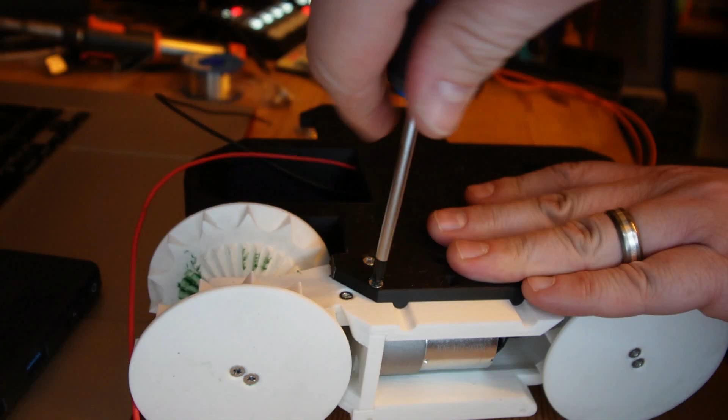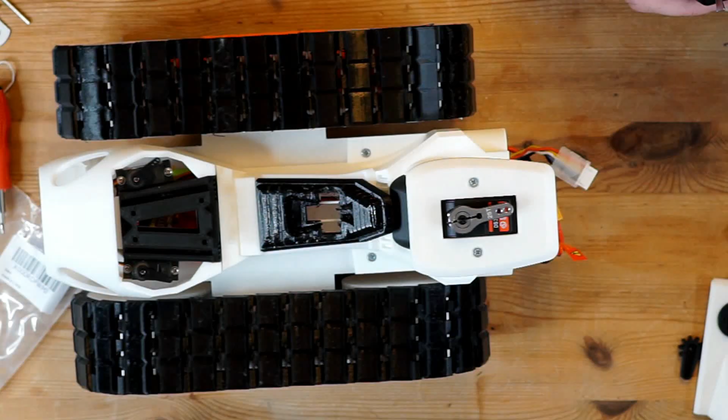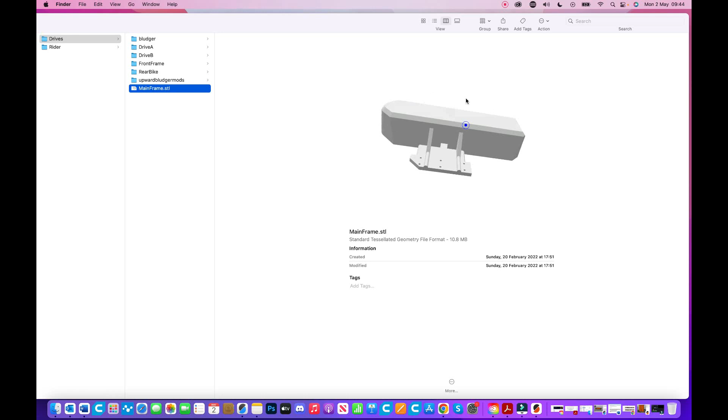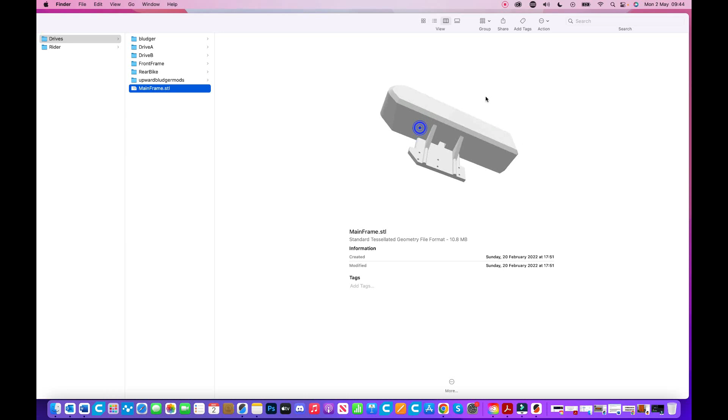Okay, so the files we're going to be working on straight away are drives A, drives B, and also the main frame. For the main frame, I'm going to be printing it in this downwards configuration, with this bit on the bed. You'll see there's some bridging that needs to be done in this battery internal compartment, certainly on the Lulzbot and also the Prusa. Any quality printer will have no problems with these bridging points, so hopefully you'll have a well-tuned 3D printer for this kind of stuff. I wouldn't put any infill or supports inside of that because it'll be a real pain to get out, but that's a relatively simple one. 20 to 30% PLA or PETG is generally what I've been using, and that's a really easy one to start off with.

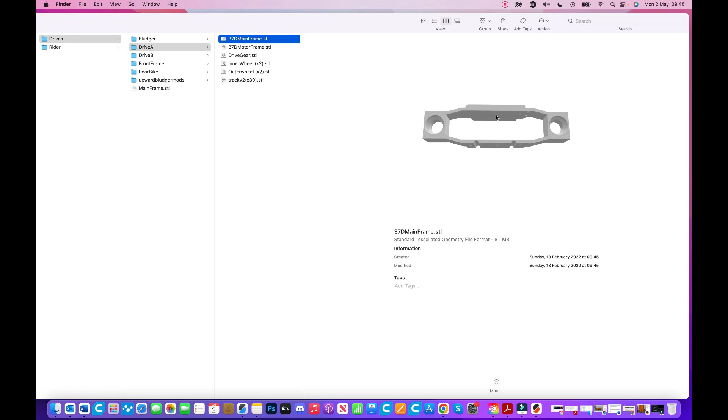So drives A and drives B are basically mirrored. You'll have a frame, which we'll be printing in this configuration. I wouldn't bother putting in too much support, though you can inside of these parts if you wish. There will be some bearings sat inside here, and here, and here, so if you want a nice smooth finish, that might be the route forward for you. Let's have a look at what else we've got here.

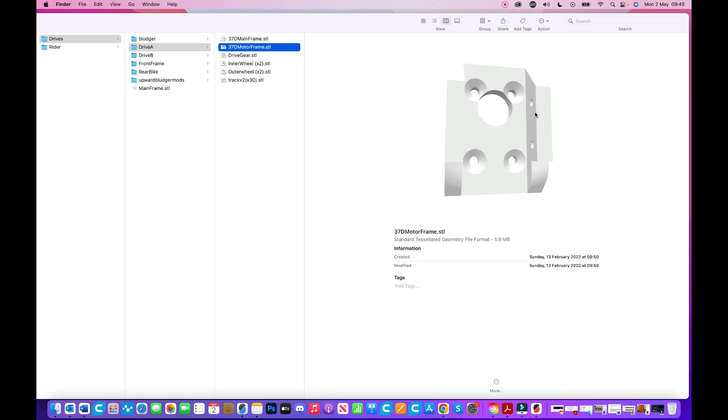So we've got a frame part here as well, again very easy to print—this is where our motor is going to be sitting. On the drive gear, again relatively simple. I usually print these in PETG just because there's a slight wearing element on this, although the plastics we've been using with these types of drives have been pretty much flawless. We do also put a little bit of grease on the side of these, just to keep the friction down and maintained.

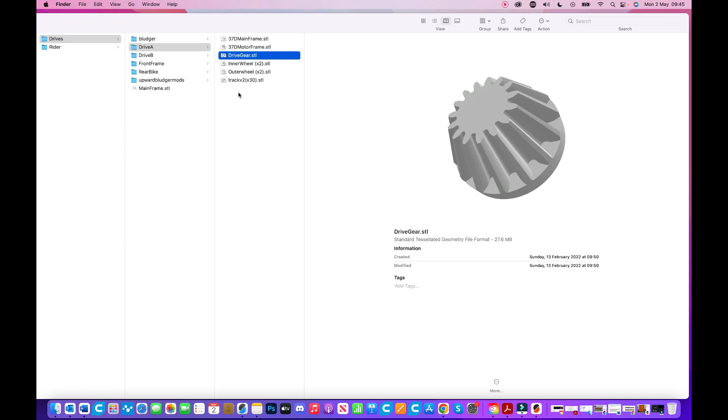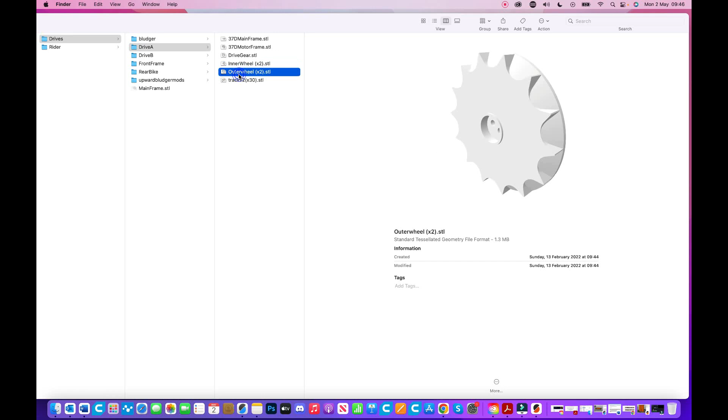On the inner wheels, we're printing two of these, and the drive gear will eventually connect to the inner wheel and spin them. We print two because there's no point removing this gearing since it's seamless anyway, and if a point of these were to break, you could always swap it over with the rear one—it just makes it easy for maneuverability, I guess. We're printing it in that configuration, two of those, and the same with the outer wheel. The bit that becomes a little tricky is the actual tracks.

These are printed, usually from my preferences, on Polymaker 95 fast flow TPU. I normally have 4 or 5 layers and then 5% on the internals. We're going to be printing it in this configuration here.

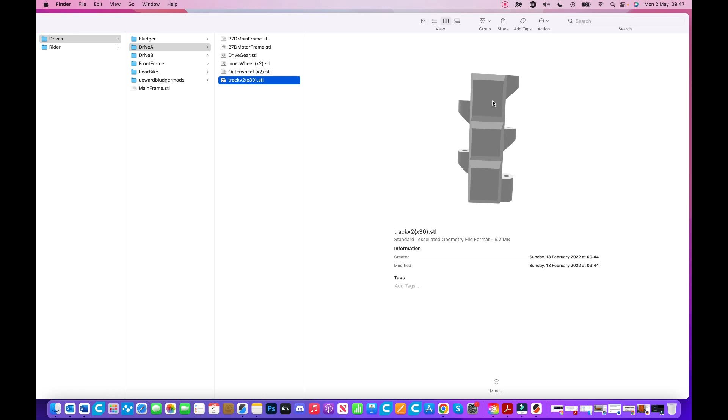And of course we need 30 of these on each side. Now, depending on what 3D printer you've got, and if you're worried about possible big failures on a relatively expensive TPU profile, you can print these in 10s, or you can print these as singles. Each one takes around about an hour, so it does take a little while to get these things manufactured.

So several hours later we do have some tracks that have now been finished, and you'll see at the top here there is some 2mm rod as well. We use this rod basically to join the tracks together, and here's one I made earlier. So this is 30 tracks on the side.

They have been pinned together. I've left one pin in there, as you can see, which is actually slightly longer. You can of course measure them, but what I choose to do is insert that all the way, then pull it back just a tiny bit, and then get a pair of pliers and just snip the ends off. I then knock the little metal parts back into the body. Make sure you leave at least one of these slightly longer and slightly out, so if you ever choose to remove the tracks, you can knock those back.

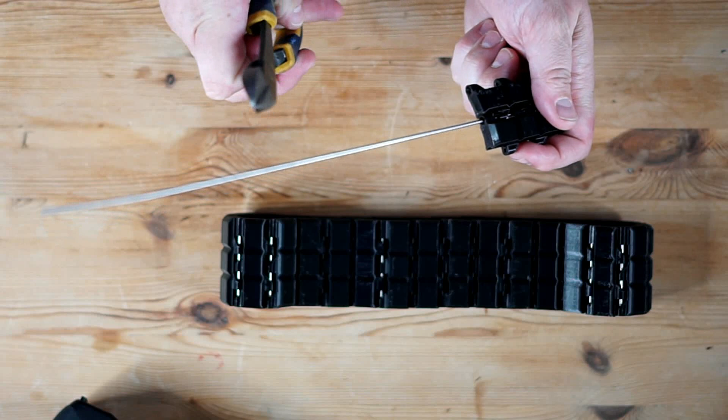And here's me just demonstrating how the 2mm rod just goes straight in, just like that. Again, all we do is pull it back ever so slightly, just a few mil, and take your pliers and snip away. Obviously you may choose to do this in a slightly different way. These come in around about 5.5 centimeters, and you can measure that and then cut the rod to the size that you require.

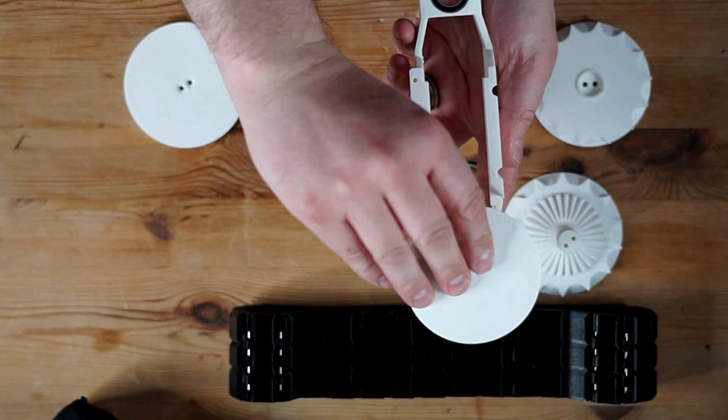So we're now going to start assembling the framework. Now you're going to need 8 6802 RS bearings. These are 15-24-5 bearings, I'll pop some links in the BOM so you can find those straight away. And all we're going to do is basically just drop these in and make sure that everything does fit.

Now just a little word of warning here, this is just a test fit. I'm just going to make sure that everything fits in there together and all snugly. And the reason I'm doing that is because if there is any variance on the print, or if the print has warped in any way, then I'm going to be able to quickly see that and solve it before we get any further into it.

Once you've installed a motor and you're trying to mount everything together, from experience this is kind of a better way of doing it, or certainly my preferred way. You don't have to do this, it's entirely up to you, but I figured it's worth just popping it in and showing you how this works. So for all intents and purposes, you can use a drill if you want to, just be very careful you don't rip the prints to shreds by threading these in.

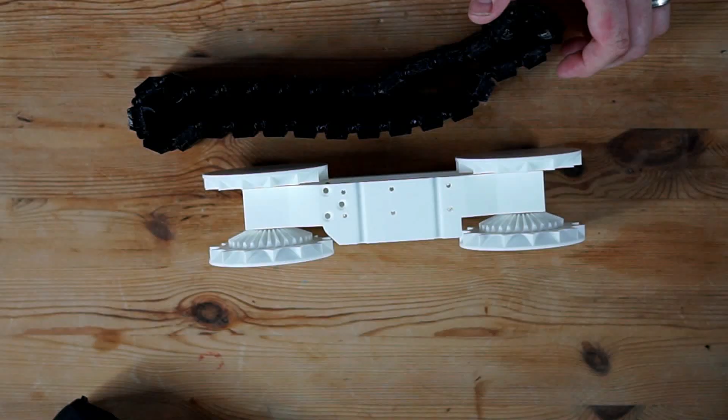And you'll notice here that these are quite short screws. The reason for that is, again, we're just doing some retrofit tests now to make sure that everything goes together just as well. So what I'm looking for here is whether there's going to be any lifting or any abnormalities on that drive wheel. It doesn't seem to be.

So we're going to whip the track apart now, removing the slightly longer pin, and we're just going to pin this back together. What I found with joining these things up, because there's obviously not much slack in these tracks, is you can move and manipulate the track around, put it on over the wheel, and then basically just knock that pin straight in, which I seem to be struggling with right now. But we got there just about in the end. There you go, job's a good one.

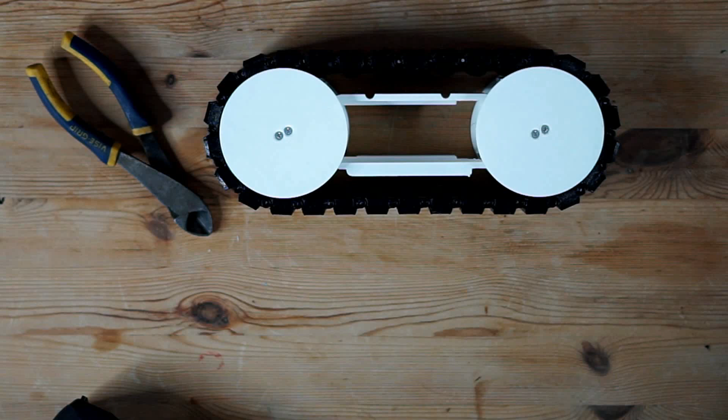From a safety aspect, I'm just going to run my fingers along the internals of the track. Just want to make sure that none of these things are sticking out. I don't really want this crashing into a child and maiming them in some way, so just make sure that they're nicely tucked away. So next up we have the 2 drive gears, which I said before were printed in PETG.

You are also going to need a couple of those screws. If the screws are slightly too long, you can cut them down, which is something I've become quite efficient at doing. Then you get the screw to your sort of size. There's tolerances on these prints, so what you don't want is it piercing through the print.

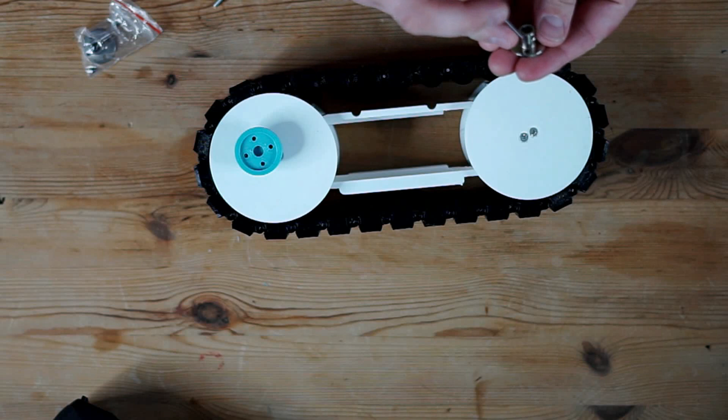So the flange couplings are next. They're 6mm inner diameter, H12 by D10 rigid flange couplings, also bought on Amazon. You do need the 6mm ones because you want it to fit the motor, and the Pololu motors are 6mm on their shafts.

What you can see in my hand are the grub screws. These grub screws are a bit of a pain. You can change them out if you want, or what I've done is use some Loctite to make sure those grub screws don't come loose. We're going to be thrashing these things around and crashing them about, so making sure they're adequately in there is the aim of the game.

You will be able to get to those grub screws. The way the motor is mounted, you can just get a little Torx in there to nip it up if needed, but if you do this right first time, you shouldn't have any issues.

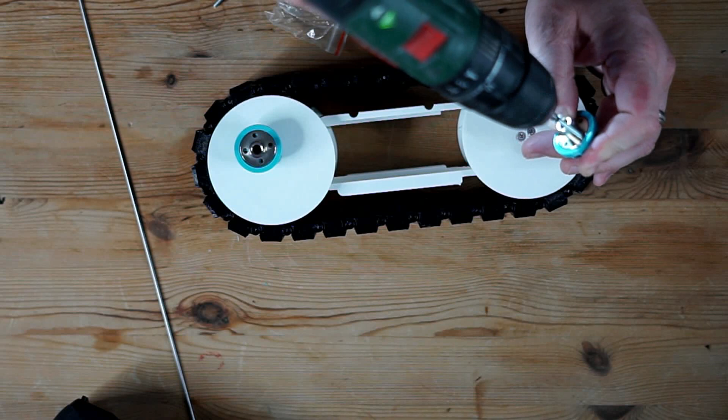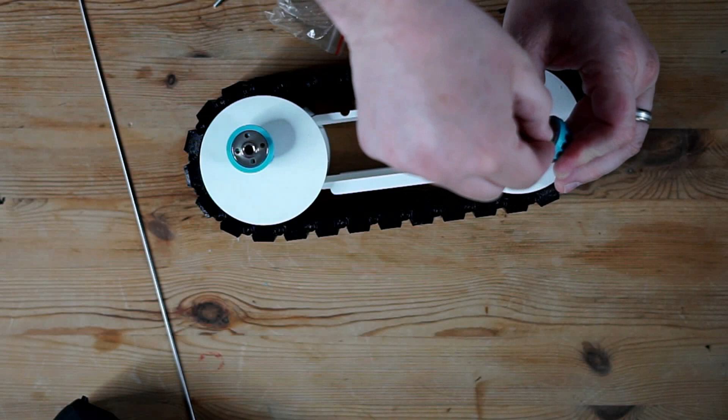Each of these couplers takes 3mm screws, around 3 to 4mm, which needs to bite just internally there. I think these are 6mm overall. I'm just going to nip that straight in. You can open these up a little if required, and sometimes that's what I do because they're a bit fiddly trying to get the tiny screws in, which is what I've done here. Then just nip it up so it's biting, just like that.

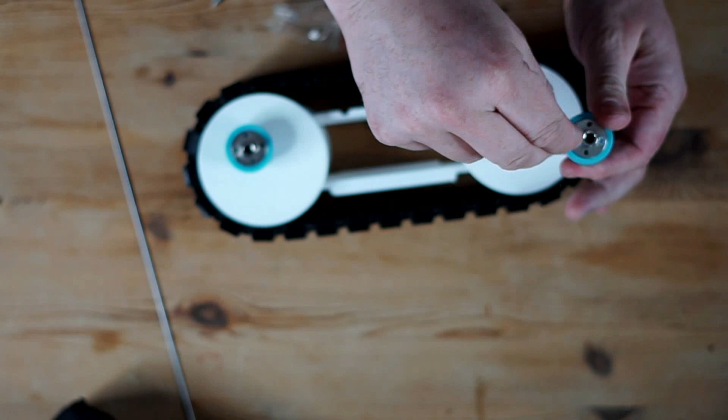We need to do that 4 times on each of these, and we only use 1 per drive motor. The motors we've been using are the 1:10 ratio Pololu motors.

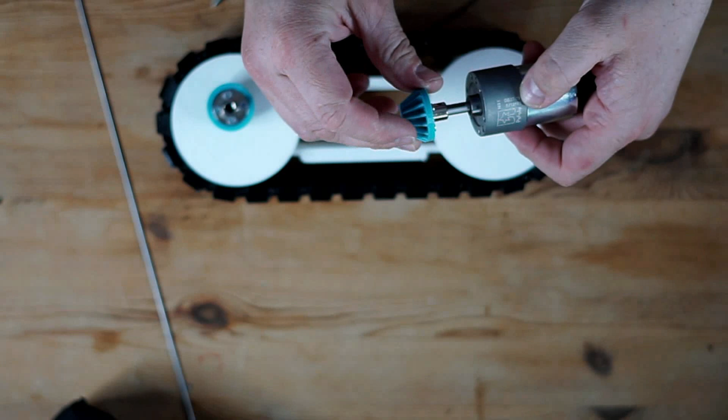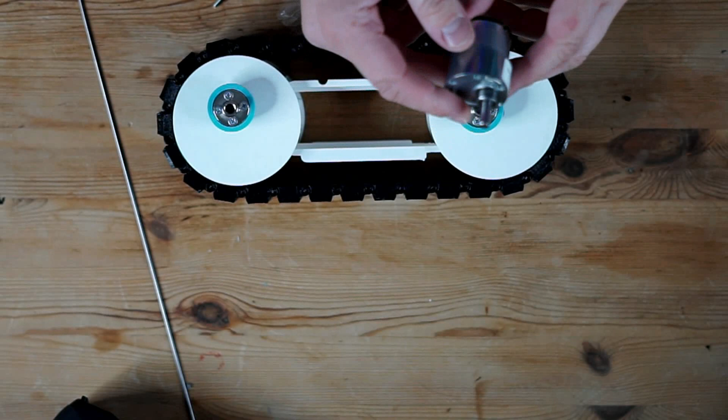In this case though, I decided to try a different type of motor, which at the end of this is actually not a great motor at all. They do move, but there's no torque to them. You can see the motor is a lot smaller. I do put these into this racer, but they're just not good enough. You want at least 1000 RPM, a decent torque ratio, and ultimately for this particular part you're going to want some sort of quality.

So I'm just going to whip the grub screws in there now, again using some Loctite on this. Ironically, I do take this motor apart, so Loctite as you will.

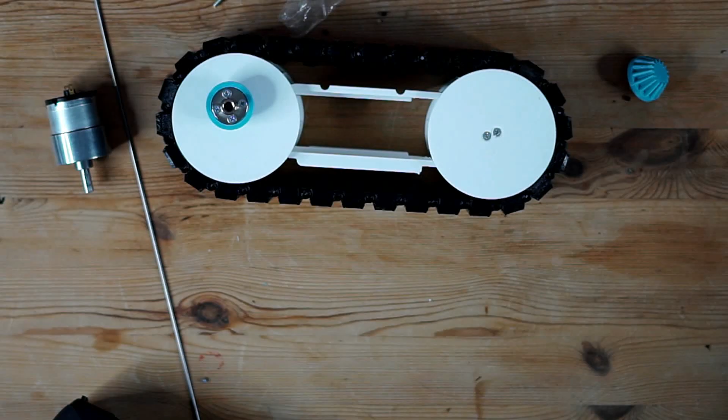I'm never going to win any awards for soldering, but I do put 2 cables onto this little DC motor. They're 12 volt cables, actually recovered from my work — there were some computers there that I basically just ripped the cabling out of, so I know they're good for 12 volt.

The other thing you need to do is probably heat shrink those parts as well, which I do a little later on. This is just to demonstrate how the grub screw goes in and how the Loctite goes on. There are 2 grub screws on these ones — you might get one with just 1, or one with 4, but this one has 2.

So Loctite that little sucker into there, and you shouldn't have too many issues with these things coming undone. In other models we've made over the last 12-18 months, the grub screws do tend to come out of these things, so that's why I'm hamming this one up. If you're going to take any advice from this video, just make sure you do this bit, because you'll be thanking me.

Well, you won't be thanking me if they come undone and I didn't mention it. So there you go, whip it straight in there. These things are a little bit like glue - it just makes sure that screw doesn't move. You can still take them in and out, and you may need to do that. I certainly do that later on in this video, but they haven't moved since, and I've thrashed them around like crazy since.

Another quick safety tip here - just be careful with tools. You can see on my finger, I think I gouged either a piece of 3D printed part or a screwdriver into my finger earlier on in the video. So just be a little bit careful. Make sure there's an adult supervising you at all times, and maybe get yourself a box of plasters, because that's a bit grim.

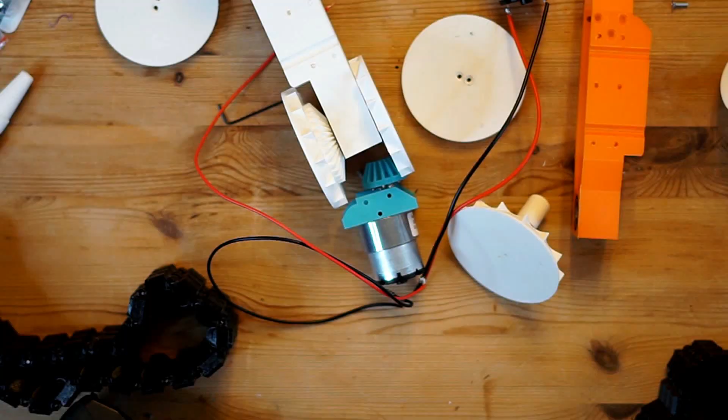As I said previously, there is a little bit of having to undo screws and put things in - it's part of the game really. So what I do here is basically just take the drive motor elements off so I can actually slip the gears in. It's the only real way of doing this. You do have to take these parts off unfortunately, but it is relatively easy to put these bits back in again.

All we do is slip those in, and you'll see there are 3 screws at the top there. You should have that if you printed the left and right correctly - you should have that on both sides, and then you can basically fire the screws straight in, just like that. So let's just check a few things.

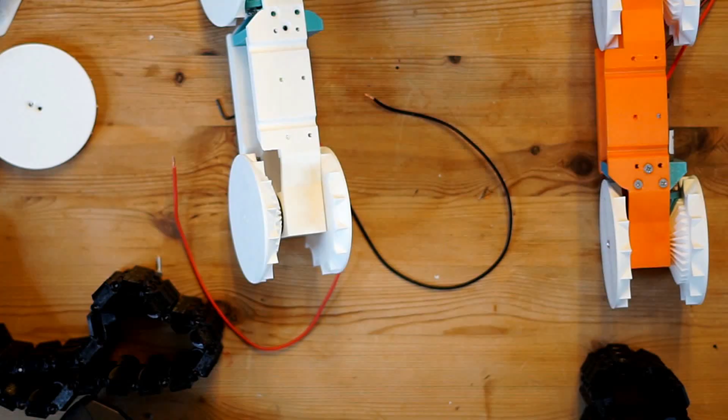Let's grab the frame and just make sure these are all going to line up and fit in correctly. You'll see on the side here, that's where the cables pop through. Just working out which way and which direction this is all going to go into. The bit with the D shape, the larger D shape at the front, that is actually the front. I was just working out here whether or not I was going to have this rear wheel driven or front wheel driven. Generally for most of these models I've had them in the front wheel drive configuration.

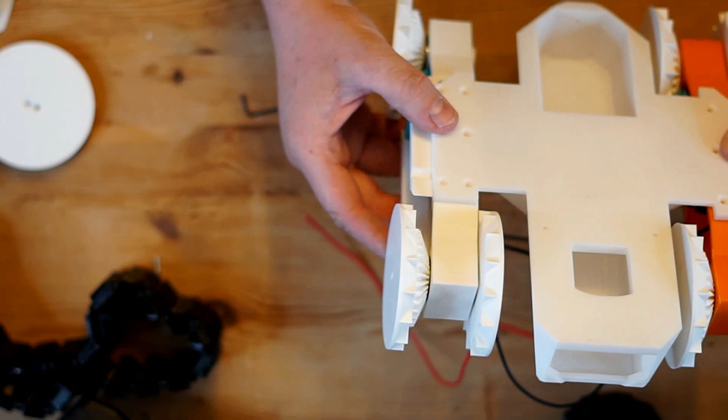As it's a tank, it doesn't really matter. Plus I guess you've got a little bit more weight coming forward that way, which might be evened up with the battery - you never know.

So all I'm going to make sure here is that actually all these things are together. Undo a few more things, put some more things together, and just make sure everything is lined up at this particular point. It would have helped if I'd labelled some stuff, so popping these things back in and just making sure everything lines up is certainly key.

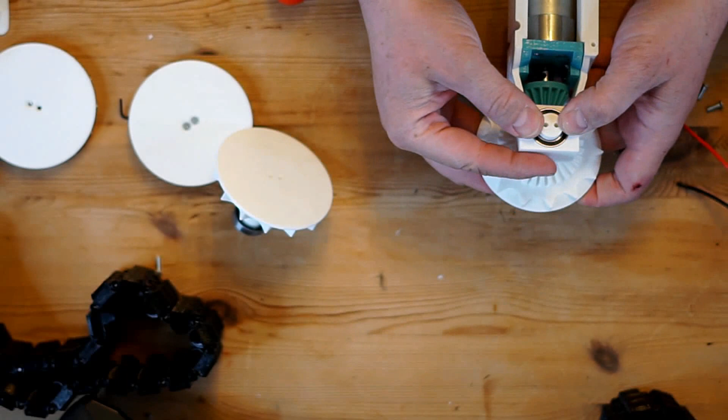So I'm just going to speed this up because it is essentially me just screwing some screws into this framework. As you can see, the wheel will essentially go on the external part of this, not on the internal part, and you'll see that in just a second there. Everything fits in together very, very nicely, and then as you turn that particular part, you'll see that the internal motors are moving around as well.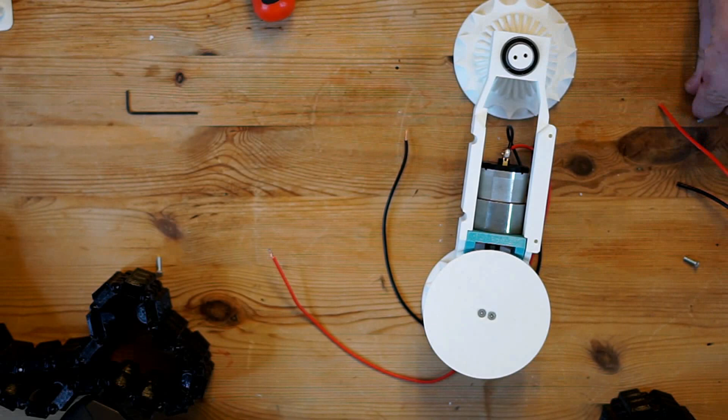Now, in regards to length and distance, if you pop that drive shaft on there, you shouldn't have to mess around with it at all, but the fact that you can get to those grub screws will mean that you can pull it forward if you need to.

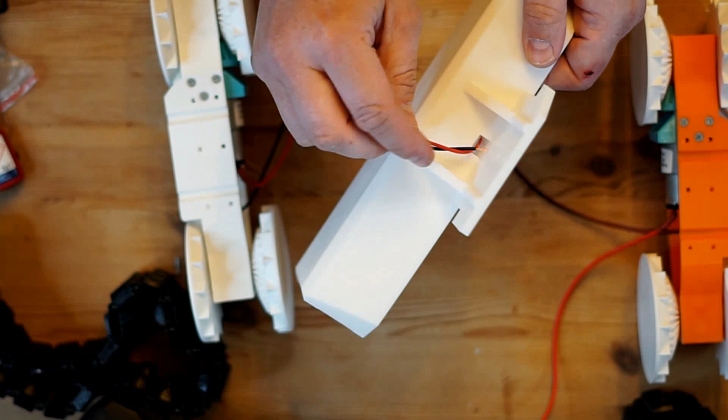And just like that, friends, you should have something that ends up looking like this. You'll also know if this is going to be run the right way, because if you flip the framework over, it won't allow you to screw any of the screws in - it will come out misaligned and stuff. So definitely front wheel drive is definitely the way to go. All you need to do is make sure you're matching up the screws. The side parts here are where you're going to put your wires through.

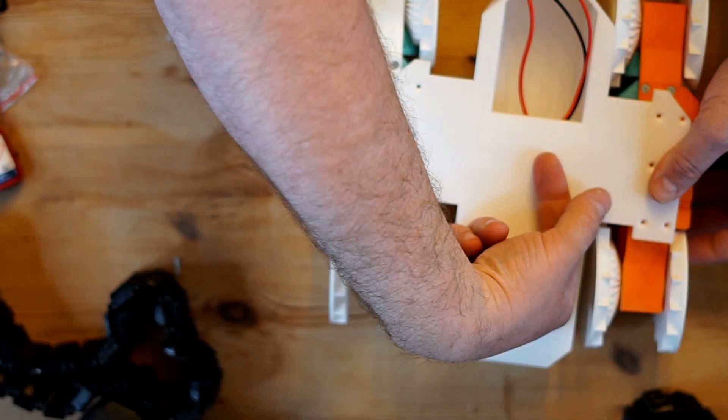All we're going to do here is just pull the cables through to the front, so when we mount everything, it'll all be there ready to go. We've got 12 screws to mount the framework to the drive motors. Very quick, very simple.

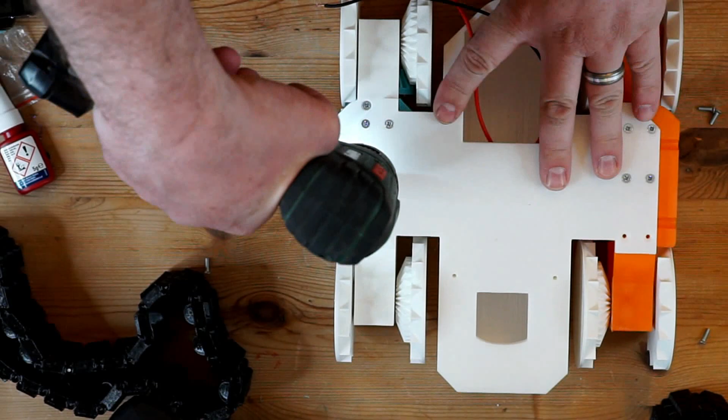We're going to whip the tracks back on now, pulling the pins, popping them around. I do ideally like to make sure we get some grease in at this point, and just run those in so we get that movement working. We don't really want too much friction across that if we can help it.

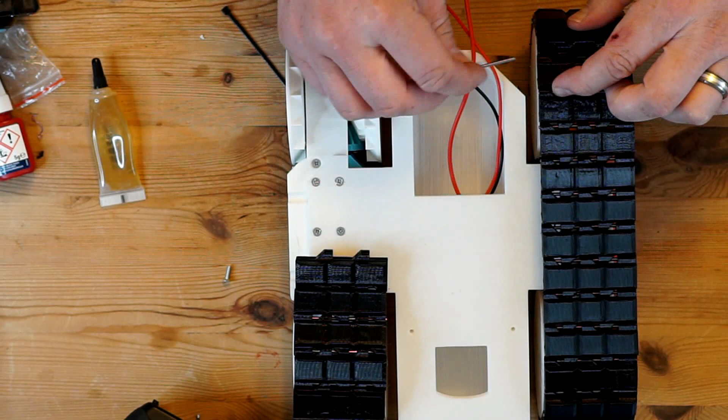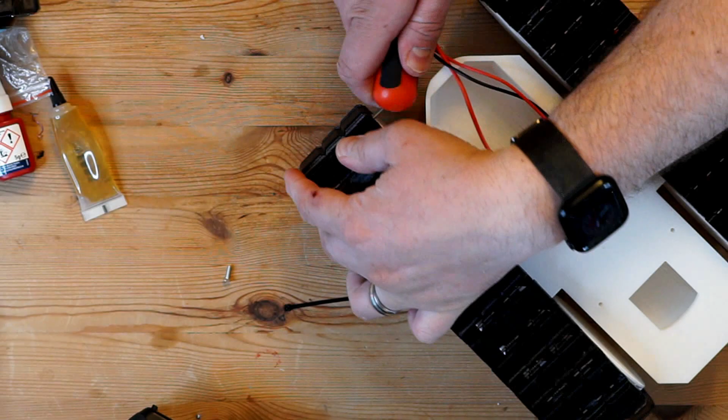Whip the pins in. Now I do these internally rather than externally, again because I don't really want a pin coming out and maiming somebody as I crash into their feet or something. So it's a good safety measure there. Just making sure everything's all together and it feels all nice and tight, and it is.

Right then, friends, next we're going to be moving on to electronics and wiring. As you already know, you've installed the two DC motors which essentially run left and right. Basically, the way forward for this is probably by stripping back the cables.

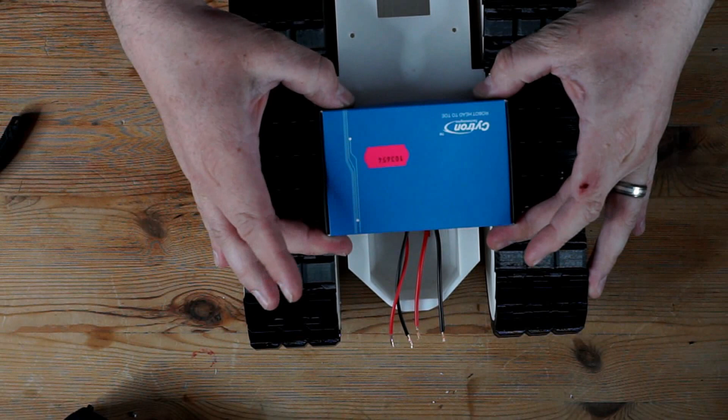You can use ferrules. I know it's very popular in 3D printing. However, I'm not going to use ferrules, I'm just going to plug it straight into this Cytron board. Now this Cytron board is actually quite unique because it is a radio controlled version.

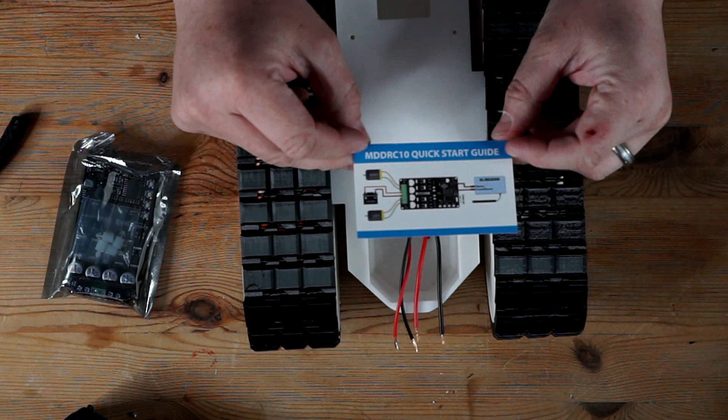There are various different types that can be Arduino controlled or dual Arduino and RC. This one in particular is the Model 10. It's a 10 amp, I believe, with two motor drivers, and the internals go from 7 volts up to 30 volts. It's quite a powerful little motor driver. From my experience with working with these things, they are very good, and I've not had one go wrong so far, touch wood.

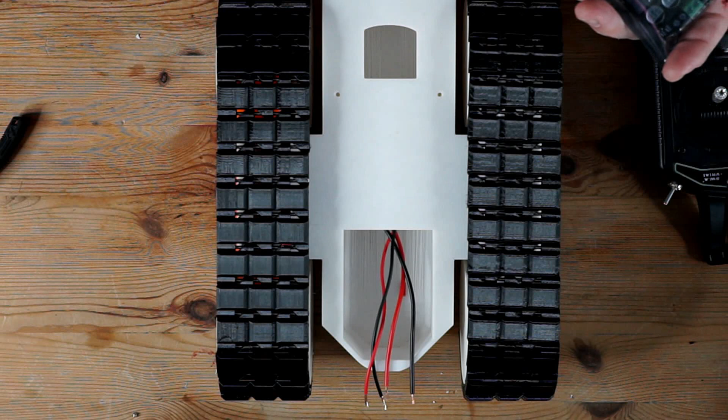So you don't have to use the Cytron version, you can just use any kind of speed controller that does forward and reverse. The motor voltage on this is 7 volts to 30 volts. Maximum peak is 30 amp at the peak and 10 amp continuous. There's a bunch of LEDs and bits and pieces there.

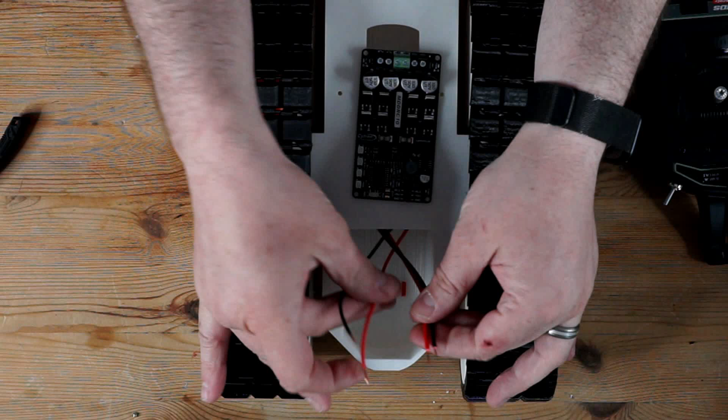Check the wiring and make sure the battery polarity is correct before popping it in. It is a regenerative motor driver. This basically means that if you push this along, it will generate power back into the battery, so you've got to be a little bit careful. It does have over voltage protection, which might be triggered if you're not careful with that. And it talks about a shunt regulator running in parallel with the power input, switching the power supply, etc.

So like I said before, this is the MDD-RC10, and again all you need to do is add your RC controller, your battery, and your left and right motors to this particular device. It has got tank control built in, I believe, as well.

And while we're on the topic of power, this is the battery that I am using, and I'm going to give you some measurements now, because this has got to go back into the battery compartment at the back, and it is super, super snug. So we are looking at 3.5 centimeters by 3.2 by around about 11, and that fits very snugly into the bottom.

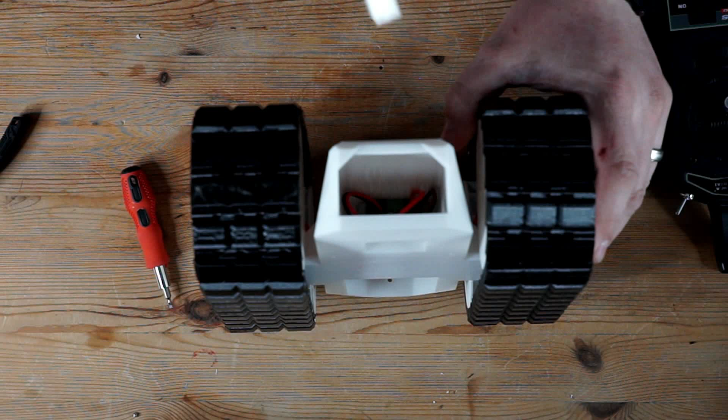Just be really careful when you're putting these things in. Don't charge it internally there, because if you do and it swells up, you may not be able to get the thing back out again. So just be so, so careful with LiPo batteries.

So just measuring this again, it is snug, especially on that particular part. That isn't so bad, you can still pull cables through, but we'll just pop that in there now. And I wouldn't put it in this way, I'm just demonstrating that it can go in. It is snug, I'm not going to lie, it's very snug, but it does go in. You give it a little push down and it will sit in there nicely. It's only snug through that particular part, mind you.

So you can run cables at the top, you can put them through the bottom. It very much depends on what your cabling preferences are going to be.

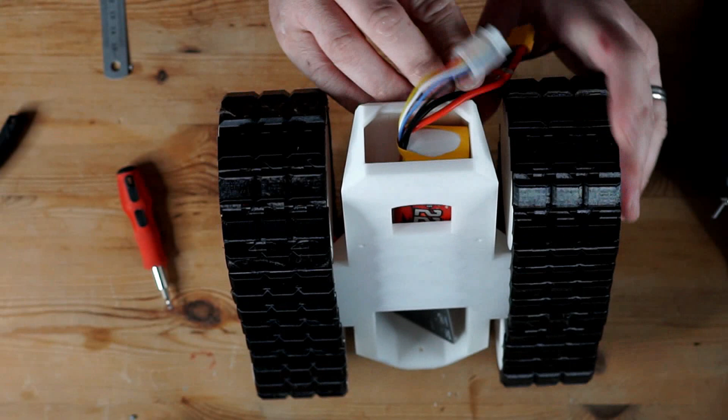If you decide to add things like LED lighting, servos, or anything else internally into this, it might be a consideration that you want to think about. The battery connection on this is called an XT60.

We will want to bridge this later on because there's also another part that we need to add into where the switch deactivates from the head, but we're going to just test this for now.

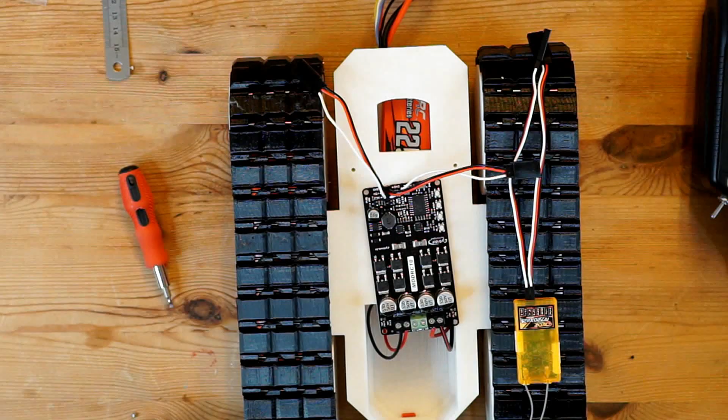I don't want to completely blow your mind here, so I'll go through this reasonably quickly. There are actually another couple of servos that basically move the arms backwards and forwards, or left and right. The other servo, in the rear, is a 25 kilo or up to 35 kilo servo, which activates the boom.

So what we're actually going to do here is twin the outputs for the data. The data cables are the white cables. All I'm going to do is make a three-way split on two of those cables, which means that when I push forward, the arm will move forward, and when I push left and right, the arm will move left and right or forward and backwards as it sees fit.

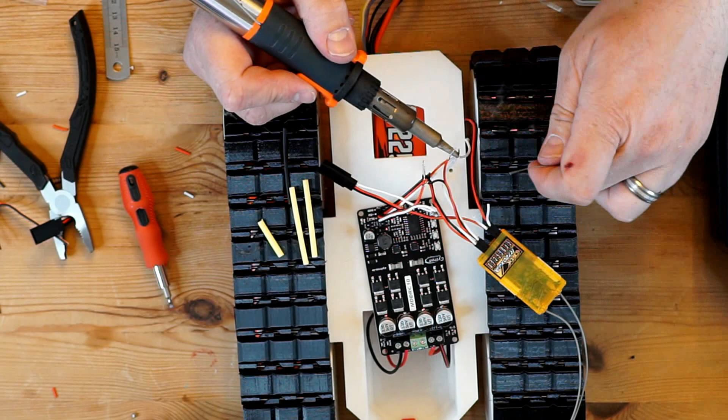The other thing I've done here is I've plugged the power, the positive and negative, the red and the black, into other ports. So the electricity is evenly spread, not just going to the board but also to the servo motors. I've found this way makes it a little bit more responsive and it's not going to pull down on the power too much. It seems to work very, very well.

All I do here is basically look to start twisting the cables together. Again, in the BOM there will be a wiring diagram on how to do this. This way that I've done it seems to be very, very effective. You can buy a pre-made loom, and it's down to your preference whether you want to do that.

The other thing with that, I guess, is your power probably will come off the same port as well, so you might get a little bit of glitching. But the way that I've done this is relatively simple, certainly the simplest place that I could possibly do it. So make sure you check out the BOM on that, and hopefully this will suffice.

Just off camera, I wired in and soldered up the XT60 cable. Don't do it the way that I've done this - make sure you've got your positive and negative colour coordinated as well, don't just use two black wires. Unfortunately I ran out of wires, so I needed to double check and make sure I was plugging the right things into the right ports. Again, going wrong on this is going to be a bit of a catastrophe, so just make sure everything's plugged in nicely.

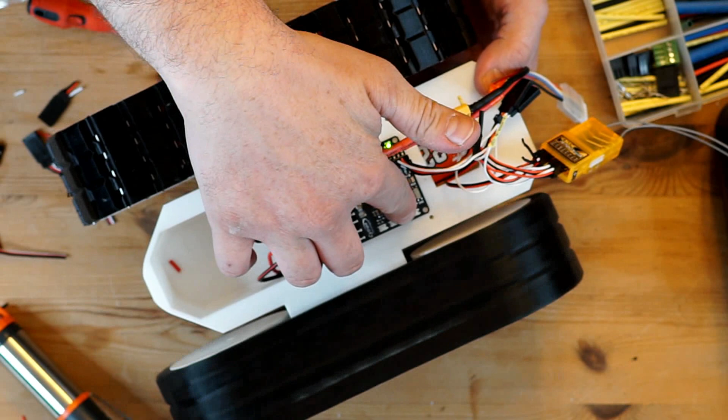All we're going to do here is plug these two together, and fingers crossed you get some flashing lights, and away we go. On the unit itself there are four little buttons, so you can actually make the unit go forward and backwards and test your motors that way, and obviously the controller's there as well. So if I push these buttons here, you can see it's going backwards and forwards, and then we can reconfigure those and mess around a little bit.

That's pretty good. I think on that left hand side there was a little bit of noise coming out of it, and you can see there's a slight wonk on the print. I don't know why that's happened, but just keep an eye out for that and make sure your prints are nice and flat.

I popped everything in together and quickly bound the radio to the receiver. I'm using an orange receiver with a Spektrum RC, and I think everything's pretty much where it needs to be. Let's have a look - forward, backwards, left and right. Yeah, it's not too bad.

Now, I did feel like these motors were a little bit slow, and I wouldn't suggest buying these particular ones, but the Pololu ones are certainly much better and much more efficient.

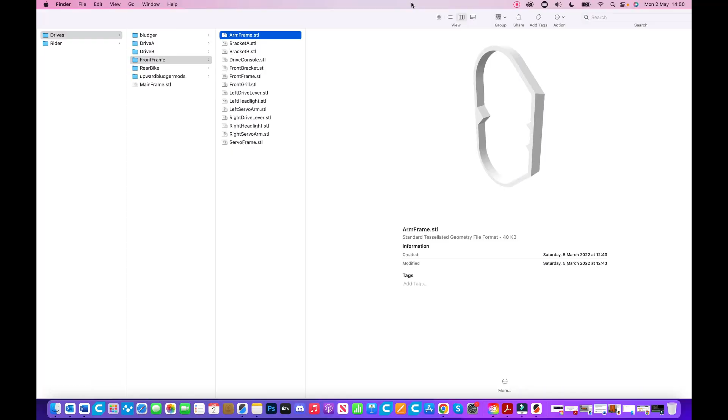So let's jump back into printed parts. We're going to be working on the front frame now, and this is a relatively simple part. This is the arm frame, and we'll come on to what that does in a couple of minutes.

You've got brackets A and brackets B, which basically hold the front of the carriage to the rear of the carriage. This is the drive console, so across here and across here will be where the arm movements will be made. The front bracket goes right at the very front of the unit.

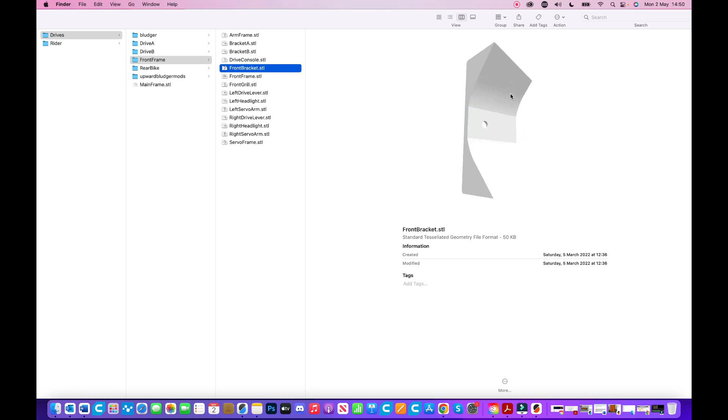That's actually onto the main kind of carriage and the main frame STL that we worked on earlier. Now this is the very front, so that basically sits on top of that frame area here, and inside of here is basically where the servos are going to go, and also that arm frame basically goes in the top of this as well. Front grille, you can customize that if you want.

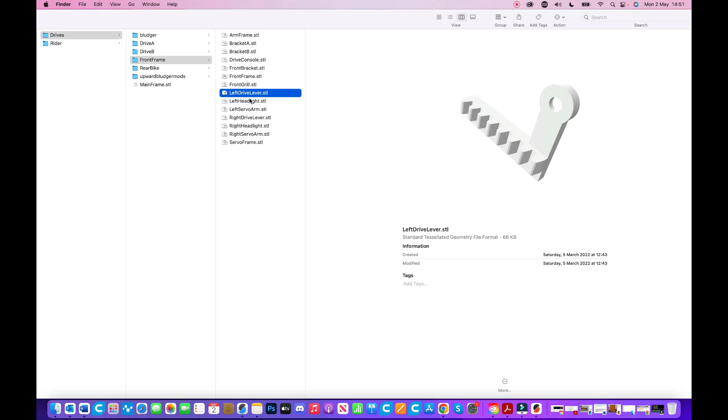This is the left drive lever, so as the servos move back and forth, this is basically how this is going to go through, and the arms basically connect to that, and it has a nice kind of movement going up and down there. Left headlight, nothing too sort of flash about this really.

You can do these in whatever colour you like and whack an LED in there if you see fit to. This goes over the servo arm and basically drives the one of the levers here, and you've got a left, you've got a right, another light of course, and then the servo frame.

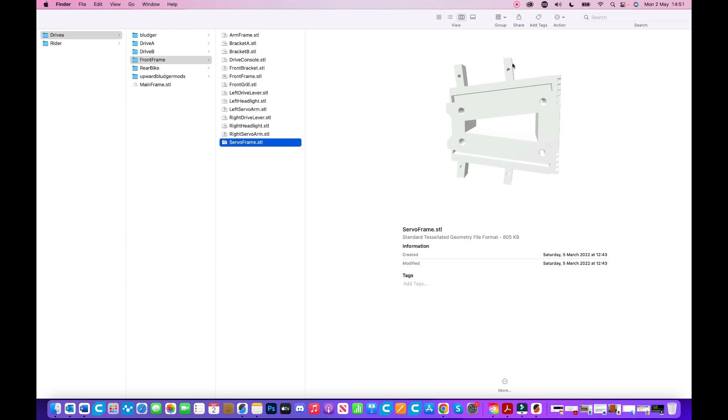So your servos will sit here and here. The servo actually, the positioning actually goes towards the top here, and that basically slots inside of this. So that sits very neatly inside of that, and then of course the arm frame then sits on top of that as well. So let's get into that then.

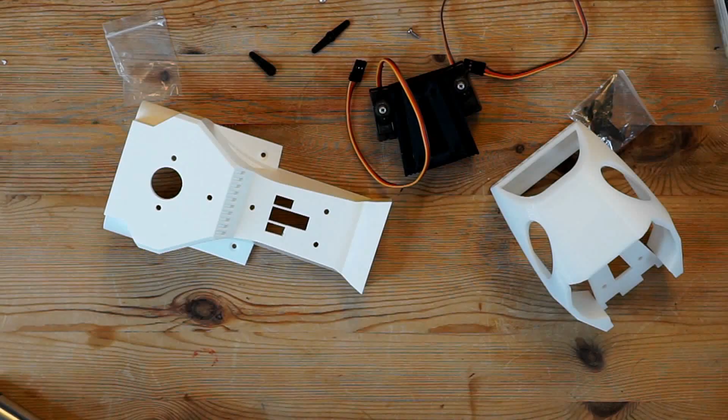And just like that, we have a print. As you can see on the middle part, which is the servo frame, I have mounted them in the upward position. I'm just going to fix those with the screws that actually came with the servo.

So eventually all 3 of these parts will actually merge together, and I'll just show you how to do that in just a few minutes once we've whipped these servos on.

Just be careful with the screws on this, because you don't want to be breaking the plastic, because otherwise you might have to reprint it or glue it or mess about with a ton of things. So just be really careful when you're screwing those in.

I will take them on and off throughout the video, because I will also be greasing the little shaft that these sit in. And also when I put the console on top, I normally have to kind of sand it back a little bit, so you just get a nice fluid motion on the arm movements.

At this point as well, if you put everything together and you screw everything down, you're not going to know where the positioning is of the servo. So it's always best to plug these in, but then don't fully screw down the servo connectors until you've plugged everything back in again and you've got some power running to it.

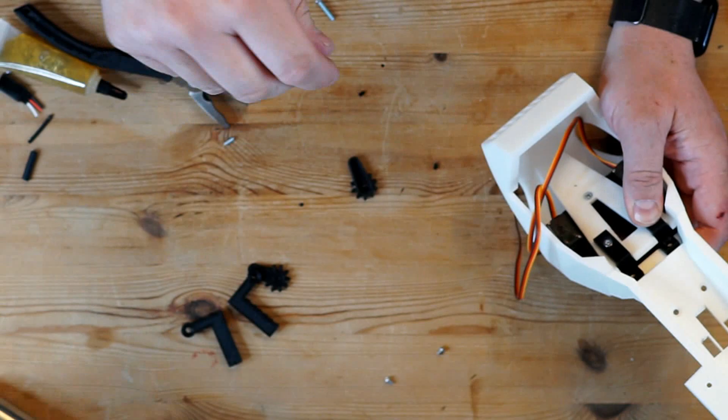So in the bottom of that, I just basically took out a couple of little bits of support, and we're going to whack 3 screws into that in a moment. Then adding the joining brackets so we can get the kind of middle section of the racer put together.

There's a few little bits here you want to probably do by hand because the drill is going to be a little bit over the top for these parts because they're quite delicate. So just be really careful with how you put these in. And that'll give you a nice sort of steady frame to work off at this particular point.

Okay, so let's head back to rear bike now. And you'll see a few files here. I just want to go through what they are.

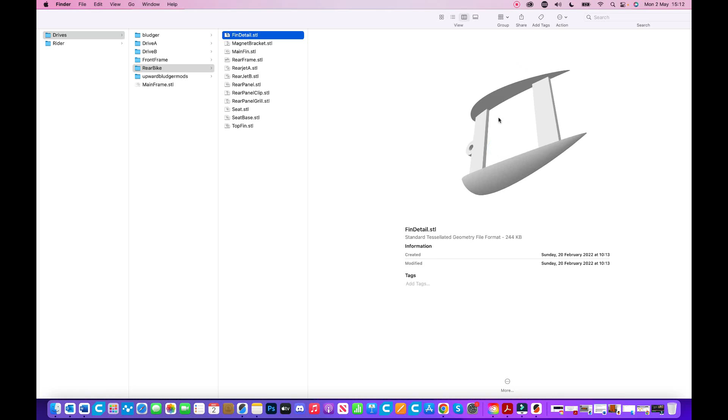This is basically just a detail that goes on the back of the unit. There's a magnet bracket that I don't actually use, but this would be used to hold the racer in place. I think it's a little bit more fun if he's a bit more loose.

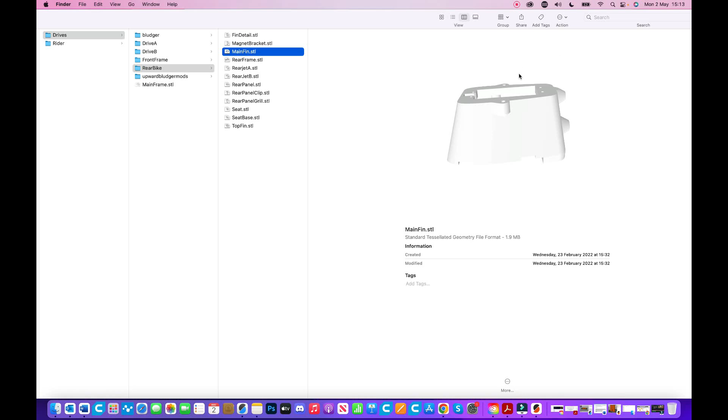This is the main fin. Now we've got a new version of this. This will basically turn 180 degrees and swing arm out left and right. Whereas the new one we've got, the servo comes in at the back and it drops down to the left and it drops down to the right. I'll show that in my next video.

But for right now, I'm going to continue making this one. It works perfectly fine, it's just more of a pain if there's a bit of drag with this unit behind it, so I just wanted to change that up a little bit.

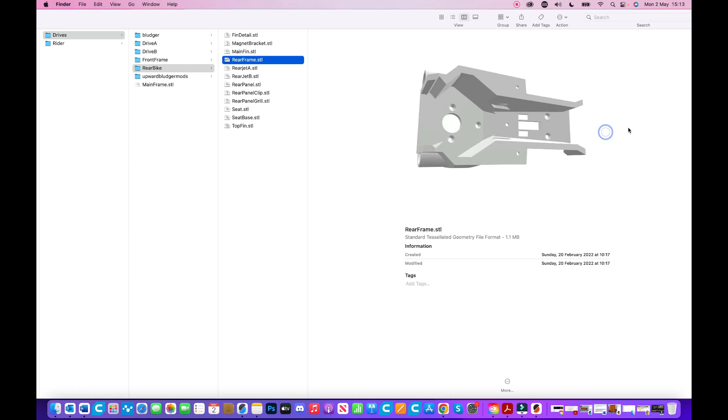We've done the rear frame. You've seen that picture, and you've seen the fact that we've just joined these parts on here. Your seat and everything gets mounted onto the back here, and then the main fin gets mounted on top of here. Your servo plugs get pushed through here, and there's a few nice little details here. On the back there are little jets, and there's a panel that you slide straight up into here just to hide your batteries away.

The rear jets are here - this little one here, and another one there. You can customize it however you want.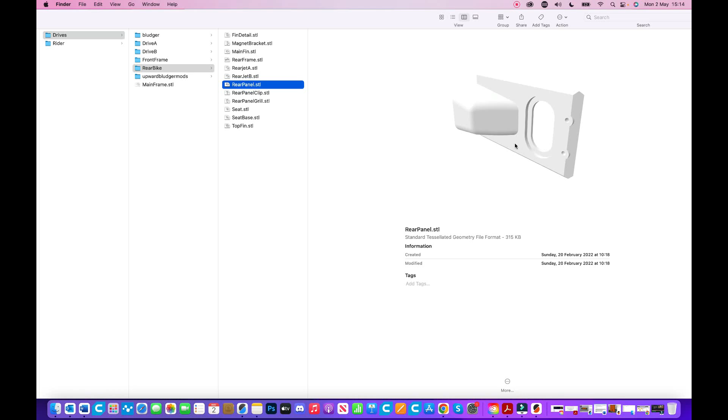The rear panel has a little insert that goes inside of here just so you've got a bit of airflow, or any heat can escape from this particular part. There's a clip that goes onto the back of that, which is based down here - that's the clip that goes inside of that.

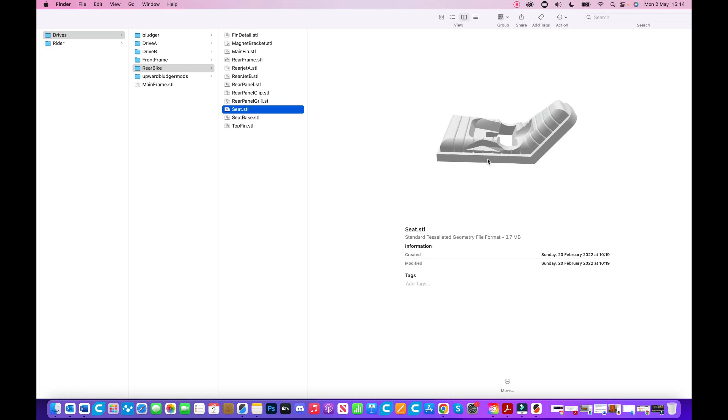Now the seat for the one I'm making at the moment, I've actually done this in TPU. There's no reason to do it in TPU, I just had some on the printer, so I thought I'm just going to print it in TPU. So that's easy, and this is the seat base.

So the seat will sit on top of the seat base, and the top fin basically hides the parts of the servo that you don't really want people to see. And the swing arm just basically comes out to here. So let's have a look at that.

So let's mount where the swing arm and the servos are going to be placed into. There's a couple of little bits here that I just need to take off - nothing too sort of over the top as that falls off. So that's basically me explaining how the swing arm's going to work.

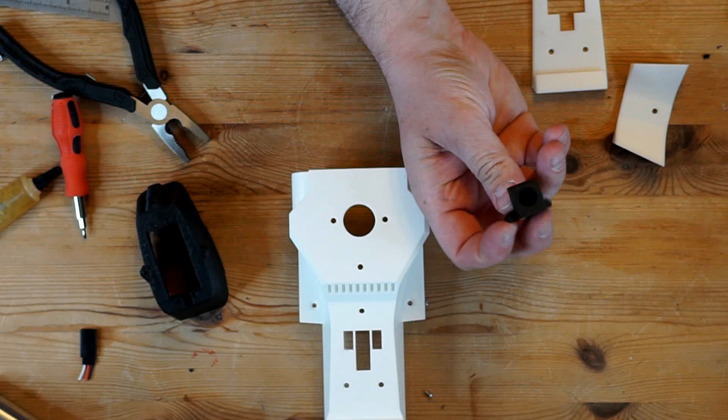And as I say, we're going to do this drop one. You can do either one, it doesn't really matter, it's entirely up to you. We'll give you both versions in any case.

Like I say, there is a magnet that can go into this. I have provided the STL with the magnet, and I'm going to put a magnet in it, but to be honest with you I'm not going to use that. I think basically you put one inside of the racer, the robot himself, and then you put one in there - they're obviously opposite poles, so it just holds him slightly in place so he doesn't fly off. However, I haven't had him fly off at all so far, and I think it really adds to the fun.

So this is the seat base, this is the seat - move him over - and we're just going to work on the servo part.

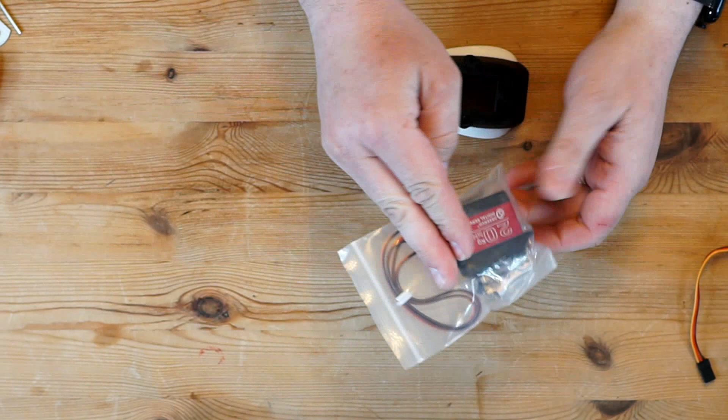So this is the fin that I was talking about, it's literally just an aesthetic. This is a 20 kilo servo.

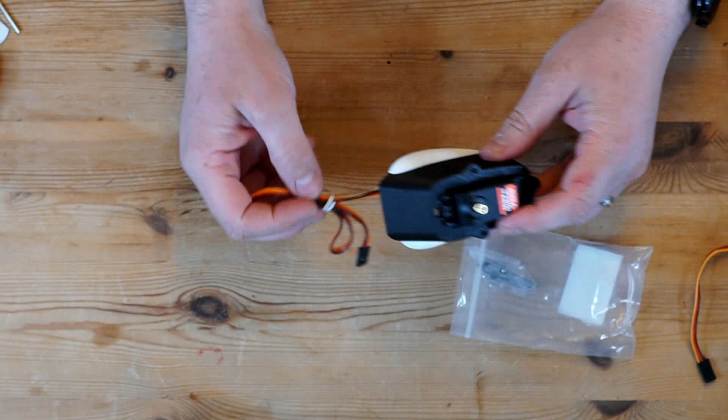I've put 25s in, I've put 35s in, I've tested all these and they all work absolutely fine. Some of them, even though they're listed as 180 degrees, some of them don't quite go 180, and that isn't just a remote control issue, that's literally a servo issue. They do all come with these kind of metal swing arms as well, and basically all of these are made exactly the same, so you shouldn't have any kind of major issues with that.

There is a bolt that goes in the top, and then you just need to put 2 M3 screws onto that. The rear panel and the heat vent do require a tiny piece of glue to be inserted. Leave that for a couple of minutes to one side while we work on some other bits and pieces.

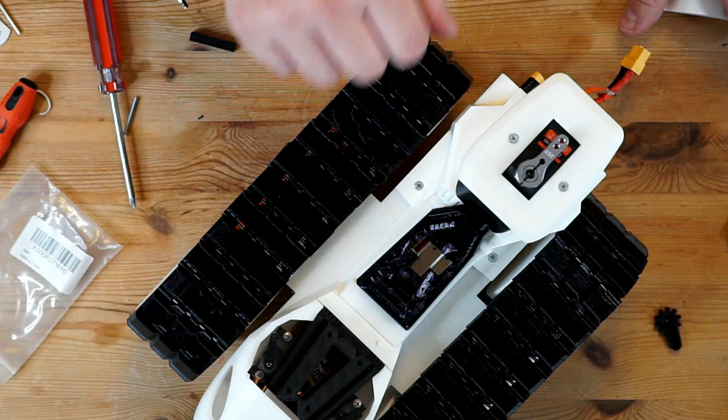On the bottom of this, again, there is a little notch that you can put in. Sometimes they are so tight you don't need to put anything in there at all, but if you want to, of course you can, and it won't make too much difference - it slides in there very nicely either way. You could always put a couple of screws in there, but just be very, very careful not to knock the battery or pierce it in any way, because you'll be in a whole world of hurt.

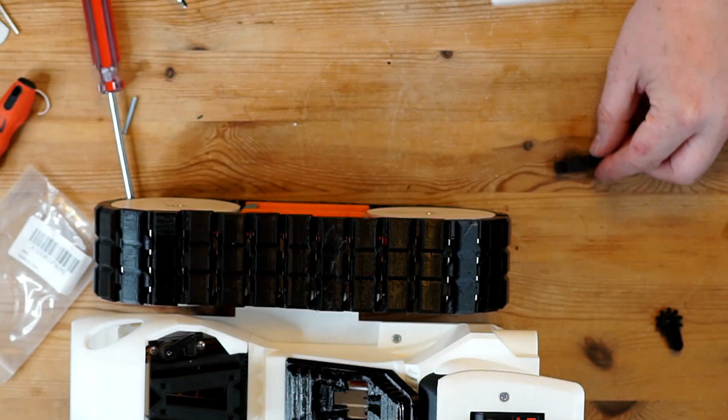I'm going to whip a bit of grease just in there as well, just so that nothing gets jammed, because these servos are quite precious. If they get stuck for too long, they are quite likely to burn out. They are very, very cheap servos - I think these ones are the metal internal servos. They tend to be a little bit better, a little bit more resilient than the plastic ones, but the results will very much be the same.

Now, as you can see on the back there, I haven't quite got that full motion yet, and there's a number of reasons for that. If I don't end up getting the full motion, I'm probably going to have to change the servo out, or upgrade that to a 270-degree servo instead.

A couple of little additions to the back there. Hopefully that's going to get you part way through this build and set you in good standing for the next couple of bits I'm going to be putting out as well. The driver is obviously the next thing to do. I'm going to be looking at 3D rendering, changing the faces - how do we change the face, what do the colours look like, etc.